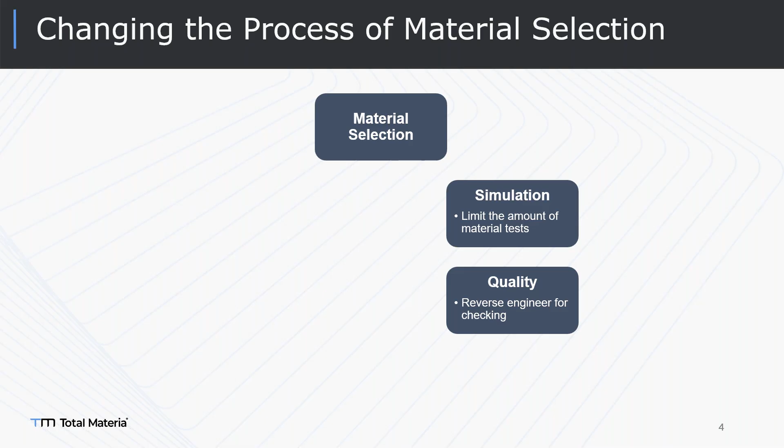Quality engineers are checking if it's the right quality material, or doing reverse engineering, we have very useful tools for that. But you choose the material, you check everything is fine, but what about where to get it, right? So the supplier or supply chain purchasing department needs a lot of information to find different producers or suppliers for this. And sustainability, your carbon footprint is important, finding greener materials for production, right? And compliance, if it's not compliant, then you need to start all over for this process.

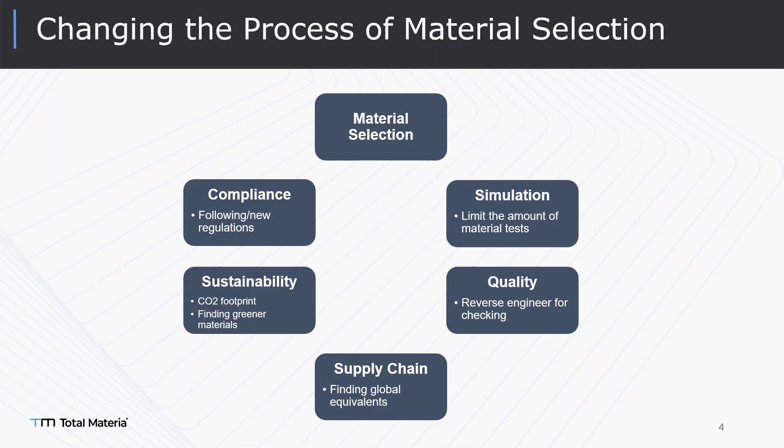So what is Total Materia doing to make sure that you're doing the right thing at each step? Not a classic way, but you have a lot more to solve, right?

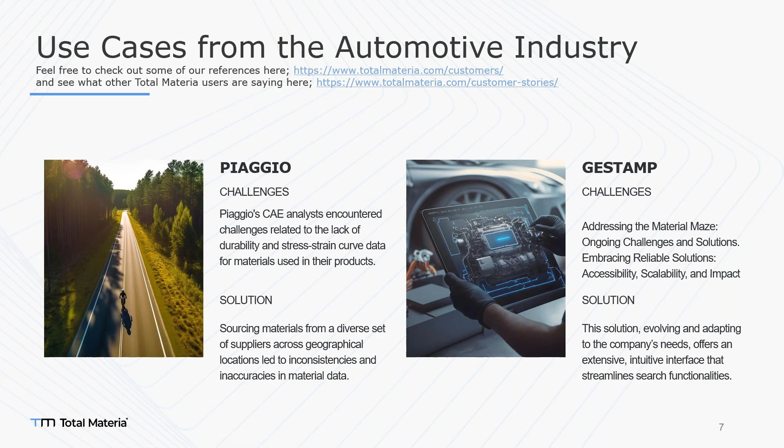We have some use cases from the automotive industry here. I'm giving you some examples, and these companies are global companies worldwide. They're making production, producing high-end products, so there's no place for mistake. But there is another industry where there's no place for mistake, if you'll agree — oil and gas industry.

SOCAR is our user, and companies like Shell, Texaco, Total — so many oil and gas companies are using Total Materia just for precision. You need to plan your maintenance activities, you need to justify your material selections. All these processes are possible with Total Materia, and they're actually very happy to use it. Every year, more and more engineers are using Total Materia from SOCAR.

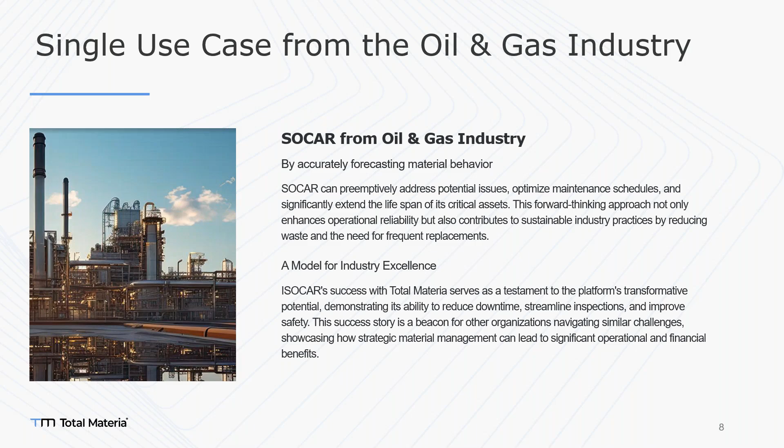This is just an example where you can find inside our new webpage references. We have worldwide thousands of users, from small companies or offices to industry leaders. Where there's no place for mistake, like aerospace, oil and gas, and so many different industries, material selection is simple and very much similar, because when you want to select the accurate material for your design, you need to check the mechanical, physical properties of the material, and at the same time fabricability, cost, availability, and corrosion resistance, among many other aspects.

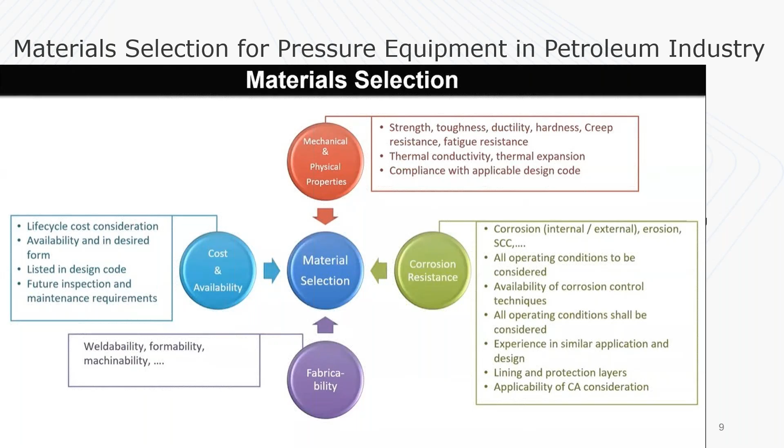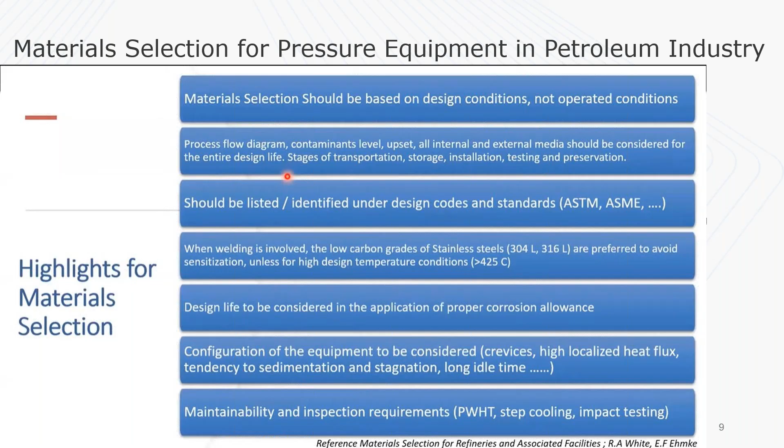And it's a little bit more complex than that. At the same time, you might need higher or lower temperature ratings or properties of these materials. It's more and more complex — you need to fix a lot of stuff, check again your design to see if it's right.

But basically, if it's hot or cold formed material, is it suitable for production? And what heat treated material are we talking about is important. You'll be able to find all these details under the same material card in Total Materia: matrix structure, grain size, composition, alloying elements, welding information, and so much more.

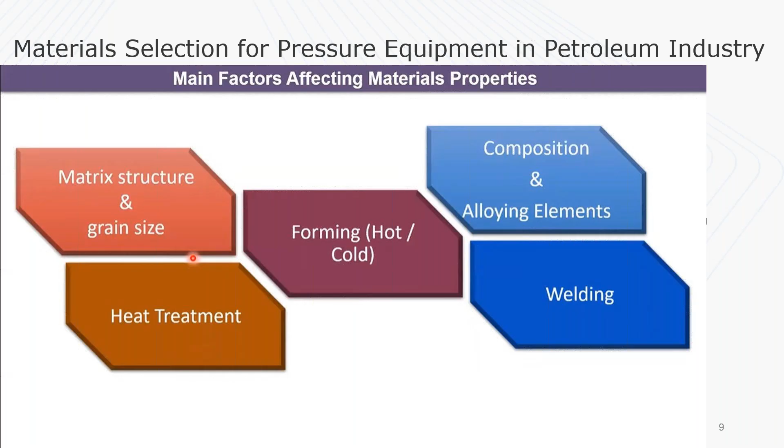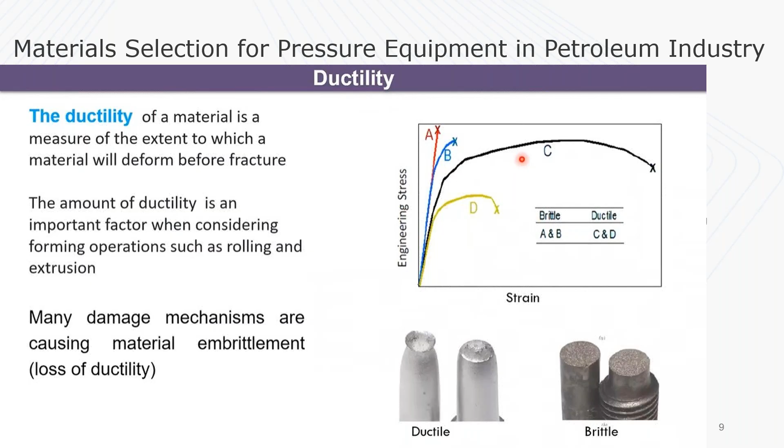Each individual bolt that you're using, you need to check again and again — engineering stress-strain, true stress-strain, hardness of the material, toughness of the material, and the effect of thickness on mechanical and physical properties. You need to check again and again to make sure you're choosing the right material from the right material groups.

That's how all these industry leaders, including aerospace industry leaders, are using Total Materia just for that. But it doesn't mean it's just an expensive solution — by the way, I told you we have different license options. So even if you're already a user, please advise your friends to start using Total Materia from today.

We'll be happy to help them as well, as we are helping Virgin Galactic, for instance — the aerospace leader — and they are happy to share their experience with Total Materia. They solve their material problems with us.

So this is basically starting with Horizon. Horizon is where you can try for free, test for free, and ask for technical support. I'm sure I can see so many of our users here today with us, and they'll be able to use Horizon for material selection, material identification, finding the global equivalents of those materials, sharing and exporting options, advanced properties, and using it as reference data at least.

We have a lot of options. We have over 500,000 materials recently — 571,000 materials according to the latest update, because every month content is updating. We are finding new materials, new material information, 80 plus global standards, which is 83 right now if I'm not wrong. When I started working for Total Materia, it was 58, then 62, 63, 65, and now 83.

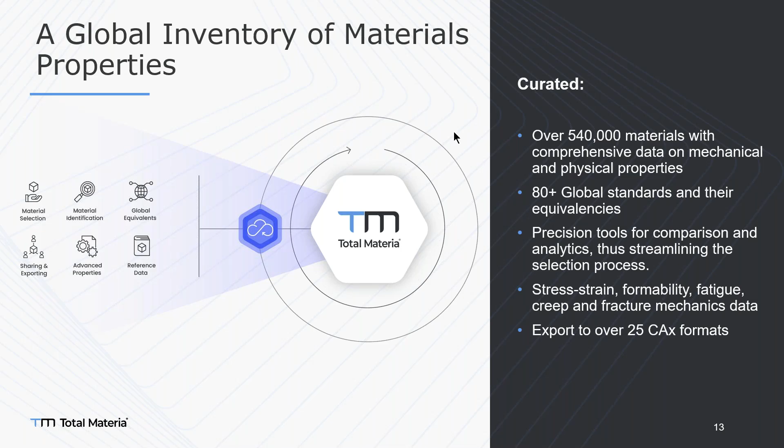You will be able to export more than 25 different simulations easily when you have Total Materia access.

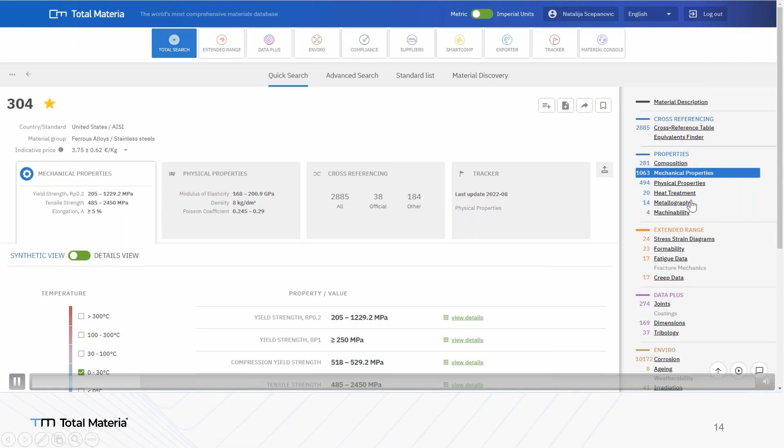This is the basic Horizon platform. You can see we have different data modules here: quick search, advanced search, standard list, material discovery, where you can search material from material designation, numerical or alphanumerical, filter the type of material - we have more than 4,000 added - and material groups. You can filter by standard, or check producers' names directly. For example, 304 American Standard material, kilogram price, and right-hand side information including material description and supplier information.

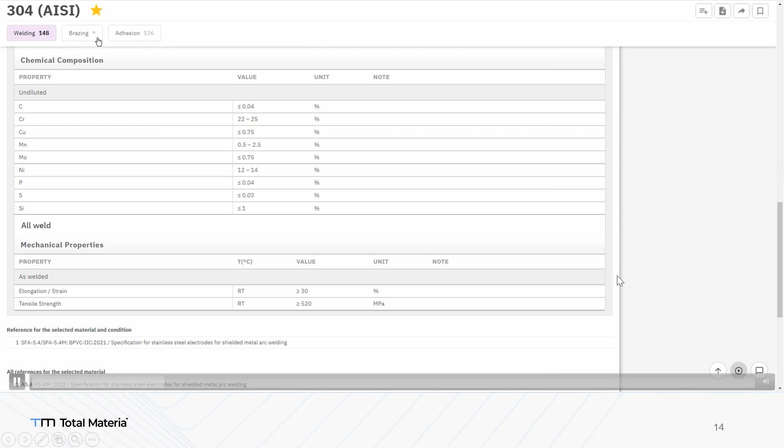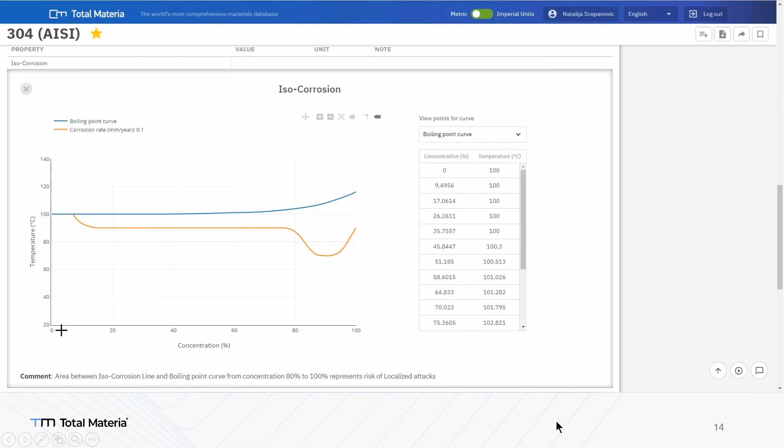You can find a lot of information about the same material: joints, 274 different welding information, SN curves, stress life parameters, isochrone stress strain, allowable stress, and isocorrosion test data. Very important for maintenance operations to calculate precisely.

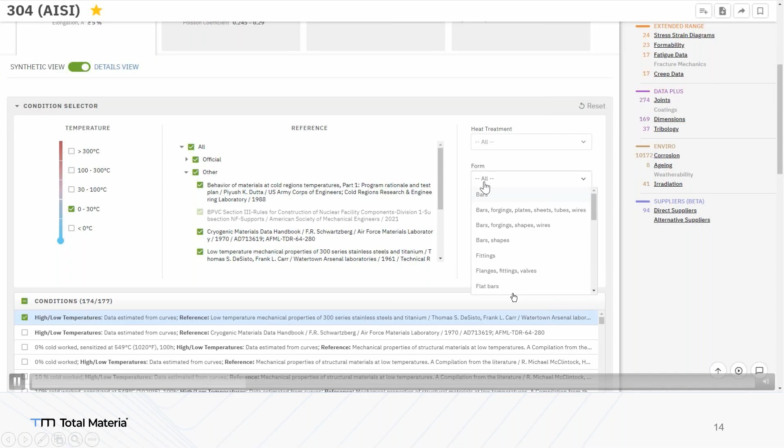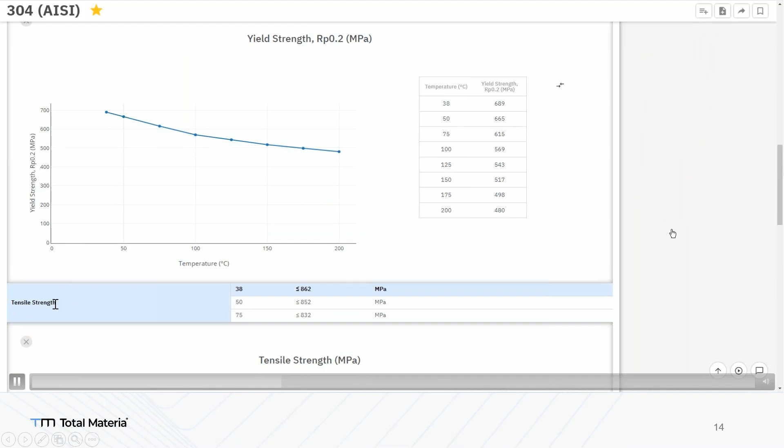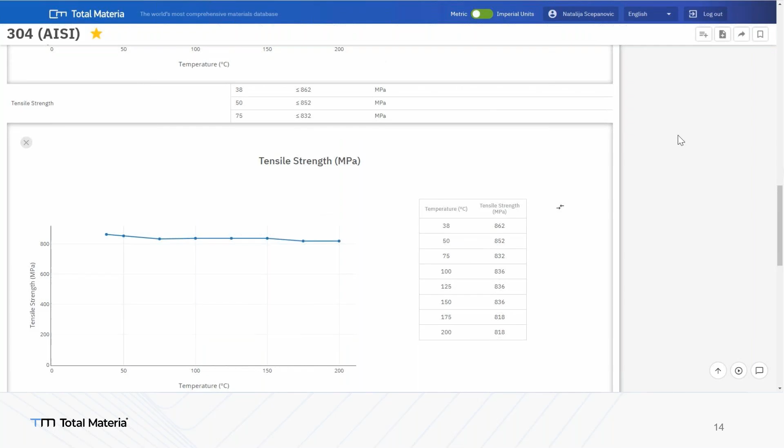You have elevated and minus temperature data and references, where you can find when and which standards cover what information - heat treatment, forms of material giving different mechanical and physical properties, and dimensions. Different sheet metals or wires in different dimensions give different properties. You need all this detailed information with references - you'll always be able to reach the reference for where we found it, where you can compare, and these are only accurate information.

With one click, you can use ANSYS, Abaqus, CATIA, SolidWorks, Siemens NX, any software you're using. With a couple of clicks, through careful selection, you can use this material card in your software.

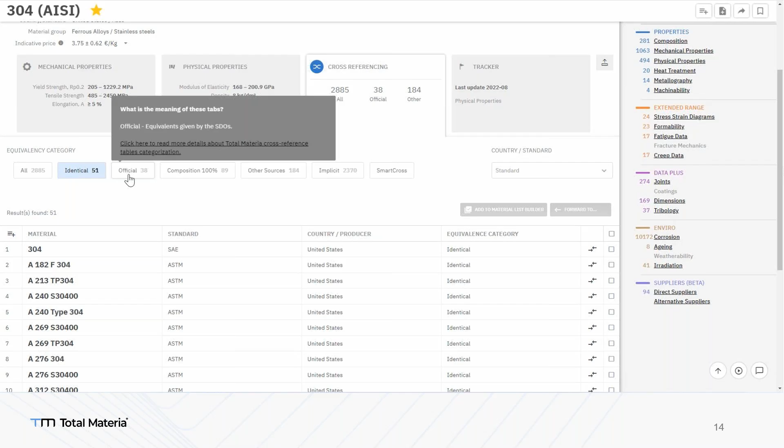Cross-reference is one of the most used case scenarios in Total Materia. You have a 304 AISI American Standard material, and you want to find the global equivalence - let's say the GB Chinese standard equivalence. We have 10 different options. With one click you can compare, save this file as a PDF, and get accurate information to make sure you're choosing the right alternative material.

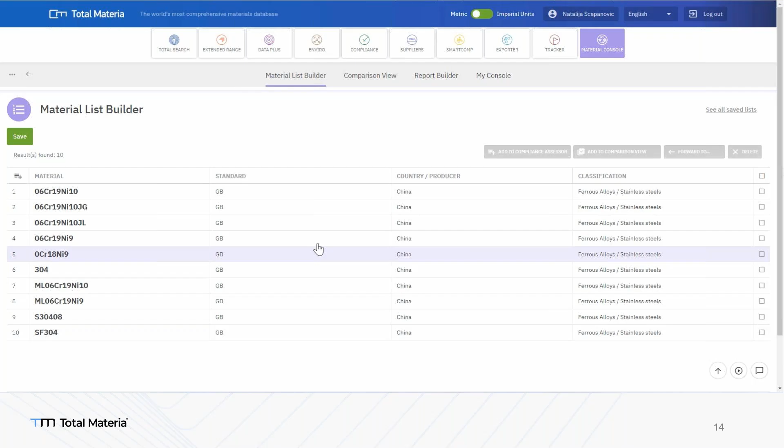You can create a material list from these materials - just name it GB equivalents of 304, let's say. You have more options, more producers now, and a lot of different supplier information you can find.

Here's the advanced search for advanced users. You can filter material groups if you want, check some mechanical and physical properties with minimum values you can add, and you'll be able to find a durable material according to your design.

You can save the searches and load these searches here. Let's choose one material - I want to show you.

We want GB or DIN standard material, structural and constructional steel, with yield strength minimum 300 megapascal and tensile strength minimum 500 megapascal. We want impact strength to be 40 joule minimum and modulus of elasticity 190 minimum - we want a durable material.

We had 500,000 materials. Now we have only 19 materials, GB and DIN standards. So these materials are okay for you to use in your design.

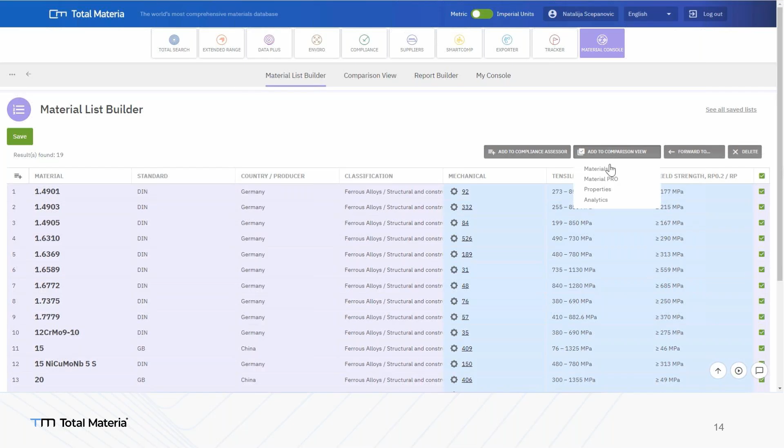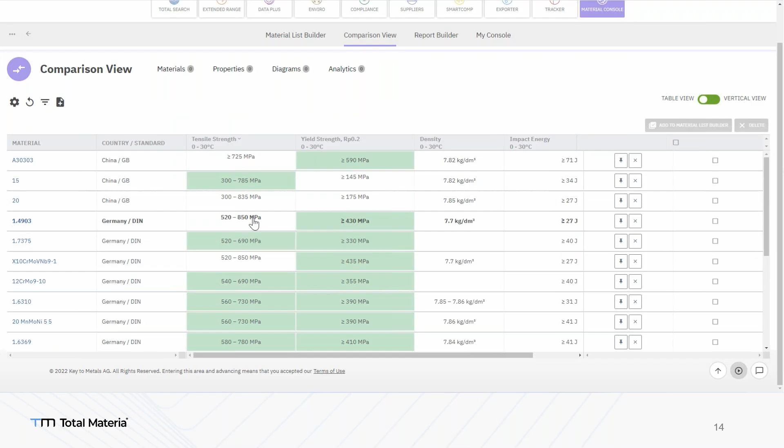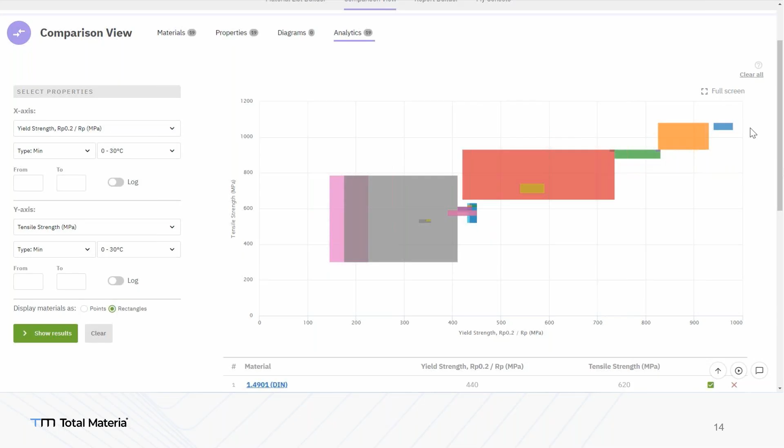You can still check these materials' tensile strength - which one is better for you, more durable, stronger, lighter, cheaper, basically better. You can compare this material side by side, up and down, and forward this material list to your analytics screen to find different aspects, comparing up to 5 different properties at the same time, or check which one is more suitable for your design.

This is advanced search, and you can also forward this material list to your compliance assessor to check if these materials are compliant according to different regulations. If they're not compliant, you have nothing to do - you need to find another one.

But the SmartComp is very different, online since 2007. This is our patented algorithm - from the chemical composition of the material you'll be able to define, or just check one of these materials as a reverse engineering action. We have quality mode, standard mode, and expert mode. When you check the chemical composition of this material, Total Materia is able to tell you what material it is.

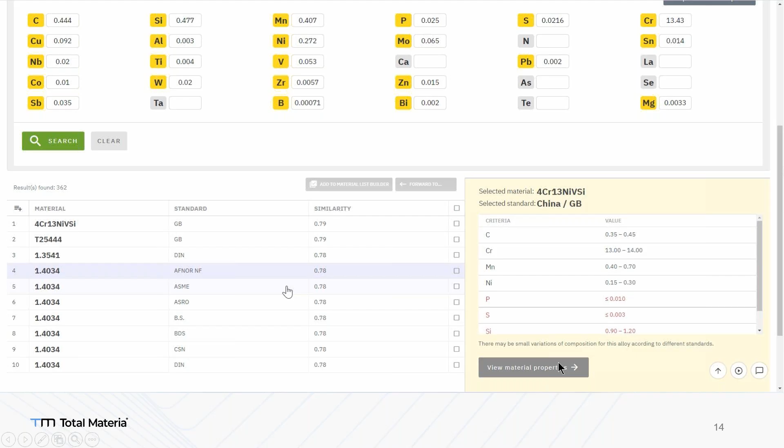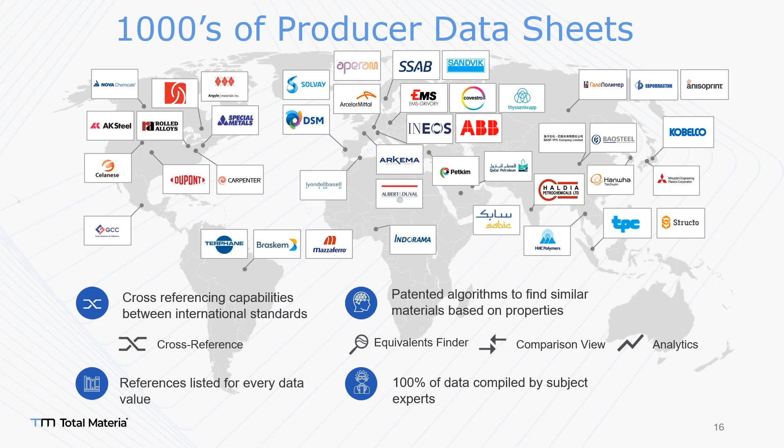This is our basic material content: over 83 standards organizations, including 39,000 local standards and thousands of producers' data sheets for real materials. Some producers make production according to these standards but name their own material differently. So it's very easy to find the equivalence and the same material, or according to mechanical and physical properties, something very similar - especially in polymers.

According to my experience, so many of our users are just checking the polymers equivalence, local equivalence. So our very important solution is the Integrator, where you can create your own internal database, basically. This is connecting our world with yours.

You can connect your CRM, ERP, PLM systems, where you will be able to access the full version of Horizon, and use them together. Together we are stronger. And you have reference data in Horizon: global alternatives, material selection options, identification, joints and welds. All this information you can use from Horizon.

You can copy all these material cards, but only the approved materials, because maybe you don't need 500,000 materials, but some of them are very critical. You can copy these material cards, create new material cards, add these materials, test information, like set your user management for who can see what material information. And this is very important for security policies.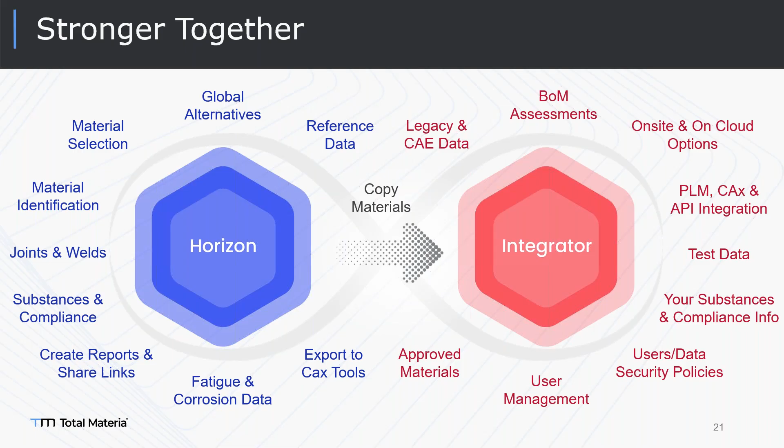BOM assessment, bill of material, you can check. And this is the legacy and simulation data, all this information that you can copy from Horizon to Integrator, basically. And this is basically MLM, Material Lifecycle Management, one step further than using only Horizon.

Because the material engineer has access to Horizon, let's say you have Greenline access to check your carbon footprint or compliance information about this material. You're filling the blanks with predictor, test simulator.

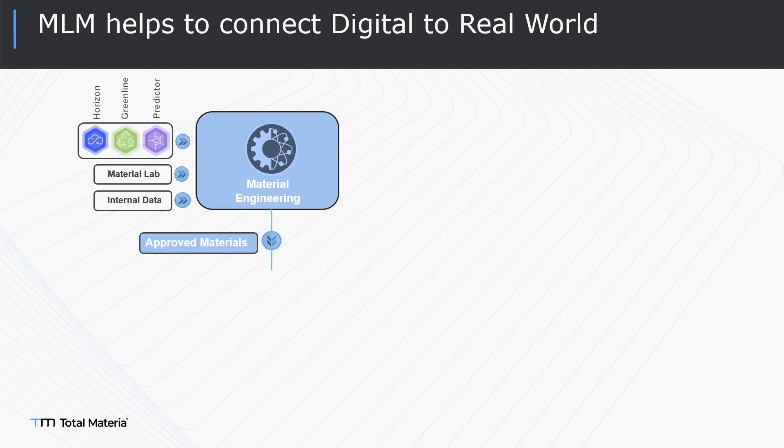Still, you have a lot of work to do in material labs. Internal data you generated, so many files like Excel, PDF, and they're everywhere. So when you approve these materials, you need to filter all this material. You can copy it inside your MLM, Material Lifecycle Management System, Integrator.

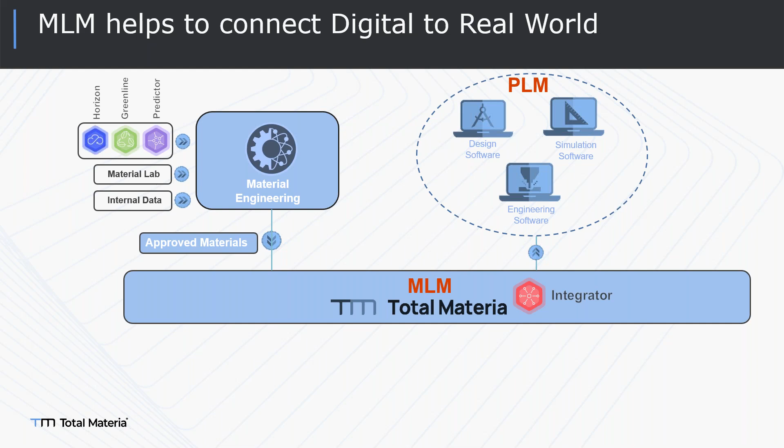When you copy and filter all this information, this will give you the ability to use all this information in your PLM system. You can use this material information with your design software, simulation software, engineering software, anything you're using. And this is actually connecting the digital world to the real world, right?

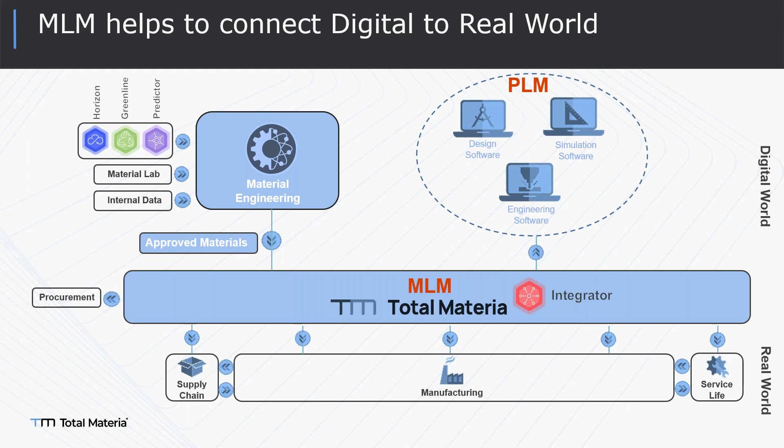So it helps a lot. It makes this whole process shorter. That's what Virgin Galactic was talking about - we had a lot of problems, and we solved all these material information problems with Total Materia Integrator, basically, and your system to fit your users.

So you have your own materials. Some of these users can access all material at the same time if you want. Admins and super admins can decide this.

And in your internal standard material, you have this information. Basically, this is your own material - no one but your company can have access.

So it gives you precision. For precision engineering, Total Materia is a must-have, obviously. That's why a lot of industry leaders are using Total Materia for years.

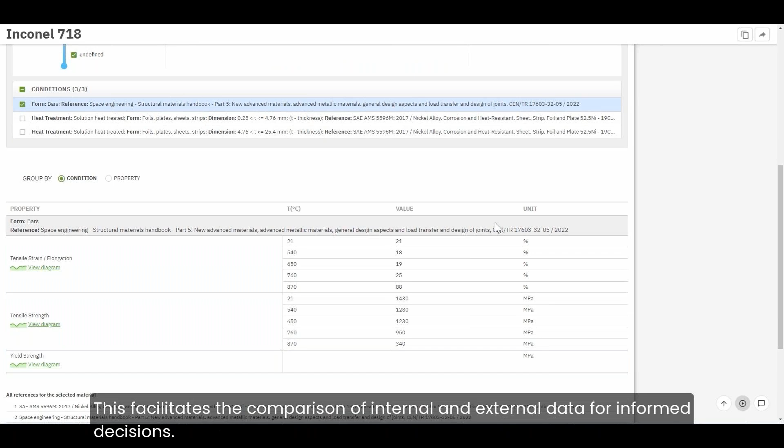You can create any material card from the beginning, or you can copy some material cards from Total Materia into your system and edit them. You can add your test data or anything you want.

Or if you want to check richer material information, like Inconel 718, a popular material used in aerospace - we have internal standards, Korean standards, and some producers using SAE and UNS standards for this material - and you want to find suppliers for it, you'll be able to check in Total Materia.

You can filter this information into your system so that your procurement engineers will be able to find the alternative suppliers that you define for this material.

You can create from the beginning, or edit all this material information. You can create material groups, create properties, add any test data you have - for instance, supplier information for this material, or any parameters you want, or references, or whatever you want.

So the bulk export option will give you the ability to export all these material cards into a certain different simulation software that you're using. That'll be a win situation basically.

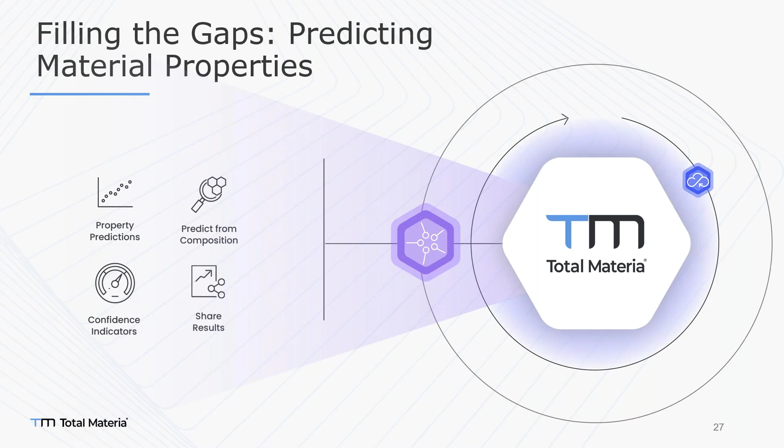More than 570,000 materials, over 25 million records of material data - we have a lot of references to make accurate calculations. Basically, this is how Predictor works, and this is how it can give you accurate results.

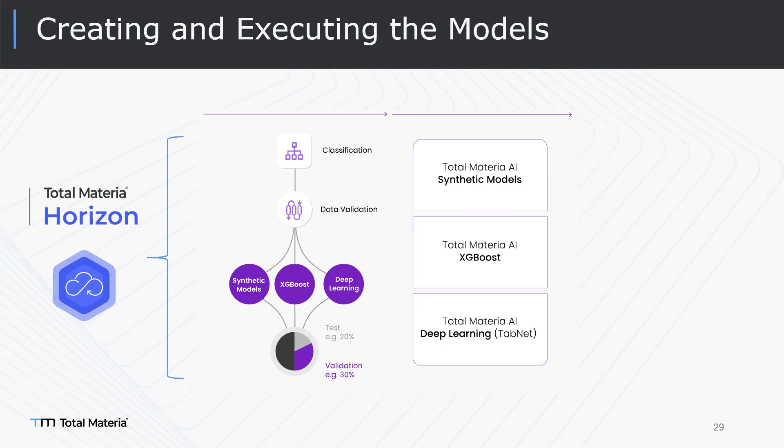It's a little complicated calculation system - don't ask me to explain all these details of how this calculation method works. Dower and Tanya will explain in detail if you really want to know how these calculations are working.

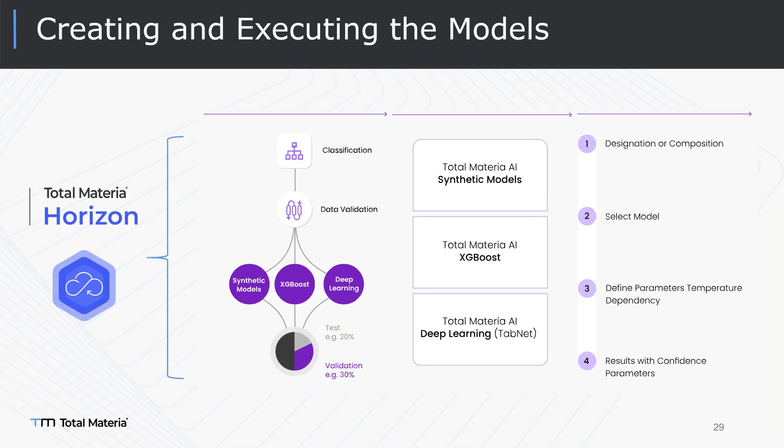We have designation and composition inputs for selecting models, and you define parameters like temperature dependency or whatever you want to achieve, and the result comes in seconds with confidence. We're using metallic and non-metallic materials to fill the gaps.

Step one, you choose the designation of the material. Let's say for one designation material, there are some properties missing. You want to get a selection for the model and set up additional model inputs.

Which Total Materia Predictor helps you with, according to what property you want to choose, giving you a couple of options. Then in seconds, AI tells you the properties - you can get this for different alloys, as you can see, including polymers. With the chemical composition, you'll be able to get predictions for mechanical properties.

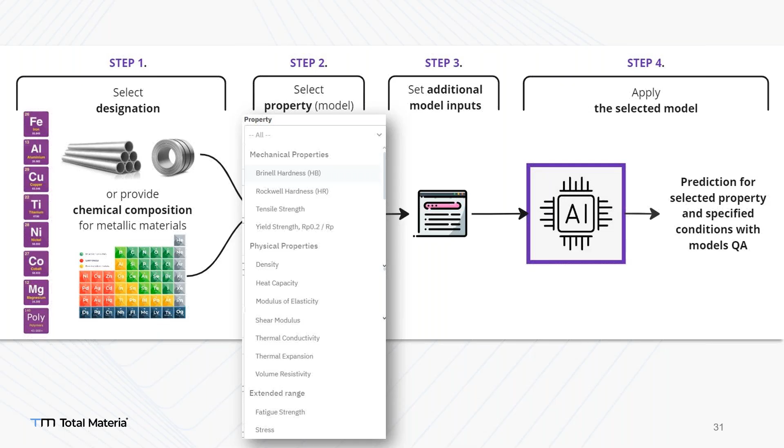We are providing hardness predictions, tensile strength, and yield strength predictions. For physical properties, we are providing density, heat capacity, modulus of elasticity, shear modulus, thermal conductivity, thermal expansion, and volume resistivity so far, including fatigue strength and stress-strain curves that you can generate with Predictor.

This is how it works - you have a material, you can type the designation or choose the composition of the material, pressing the next step and selecting the material basically.

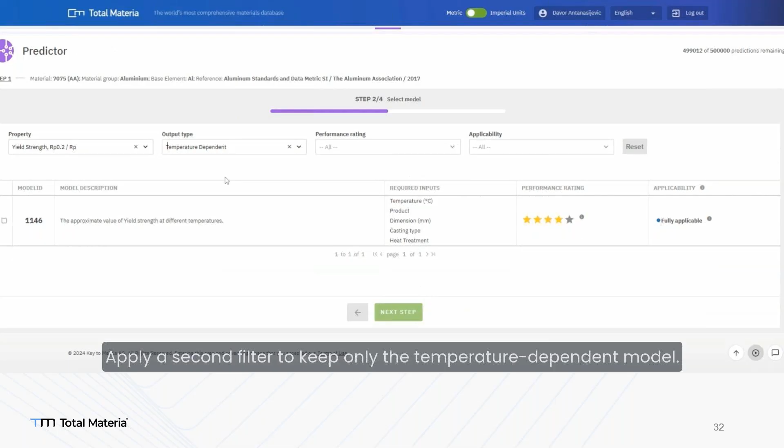Then choose the property you want to predict here, and whether you want it temperature dependent, let's say. You see the algorithm offers you the best calculation method according to your selection.

And basically you're choosing the plate for thickness 20 millimeters, and the heat treatment of the material will definitely affect the result, because you want accurate information, not just regular estimations.

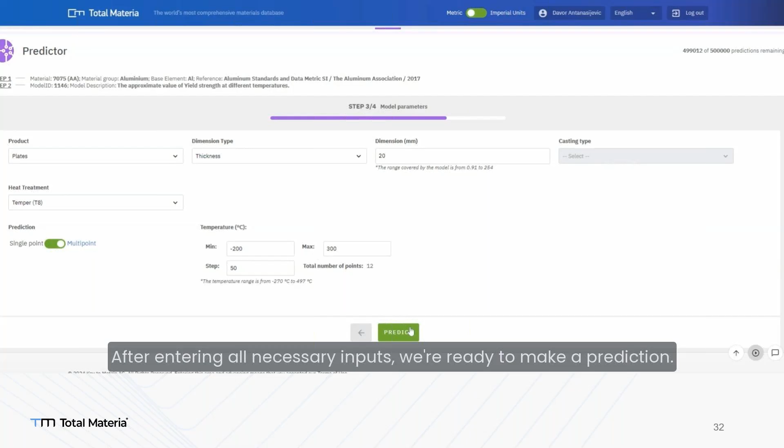You've got to make some calculations - you're going to use this info for your simulations, maybe.

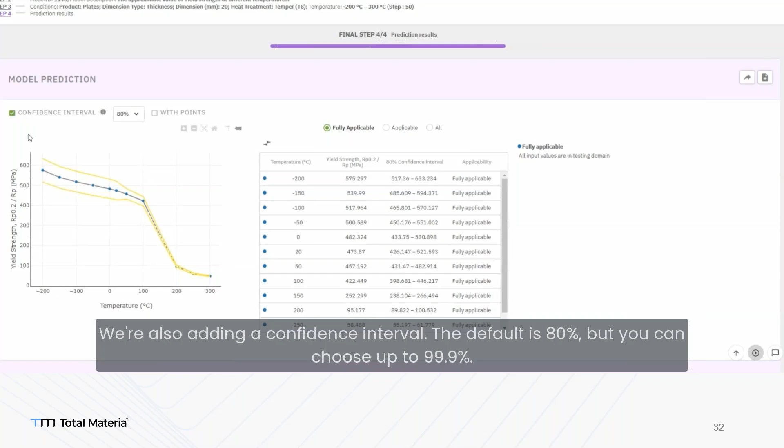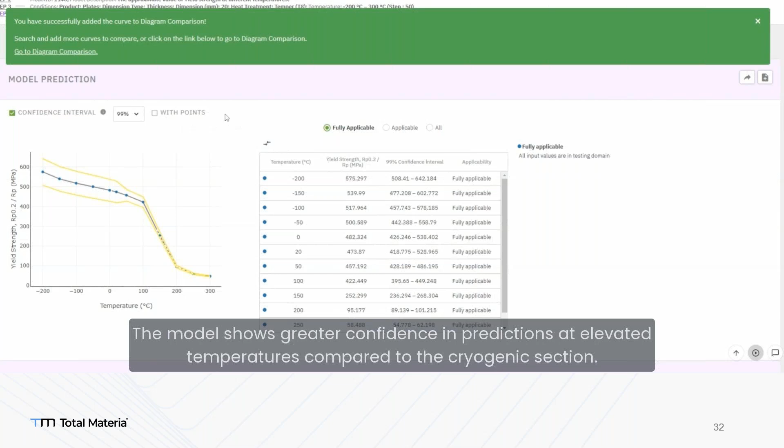The result generates in seconds, as I mentioned, and you can get these with points. You have all this detailed information across a different temperature range, and you can add this graph comparison.

Here you can see we're making the same predictions for the same material - this is the T8 heat treatment of 7075, same material and same form, same thickness, but this time we have T73. Two different heat treatments of this material - see how it's affecting results at minus temperature, especially when it's very cold. You see the T8 gives you a little higher yield strength, while T73 at minus temperature has a much lower yield strength value.

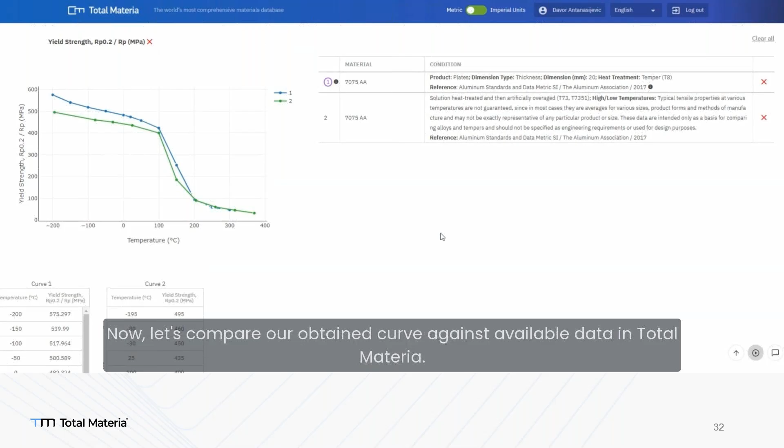So when you are making accurate calculations like aerospace industry, defense industry, oil and gas, heavy machinery, automotive, all this detailed information, precise calculations are generated in seconds. You don't need to waste a lot of money and you don't need to wait for temperature dependent tests for weeks or months. Predictor is giving you the results in seconds, basically.

And if the issue is finding the greener material, here is Total Materia Green Line for you. You can check the compliance of this material, equivalence, restricted substances, BOM assessment, LCA, carbon footprint calculations, sustainable material selections. We are proud to announce our primary source of data is coming from EcoInvent. Green Line is helping a lot of industry leaders who would like to see their carbon footprint, how these materials are affecting their life cycle assessment, or checking their materials' compliance ability.

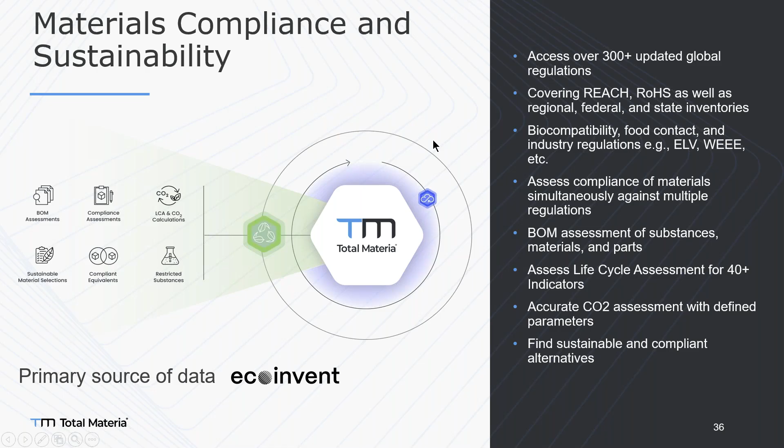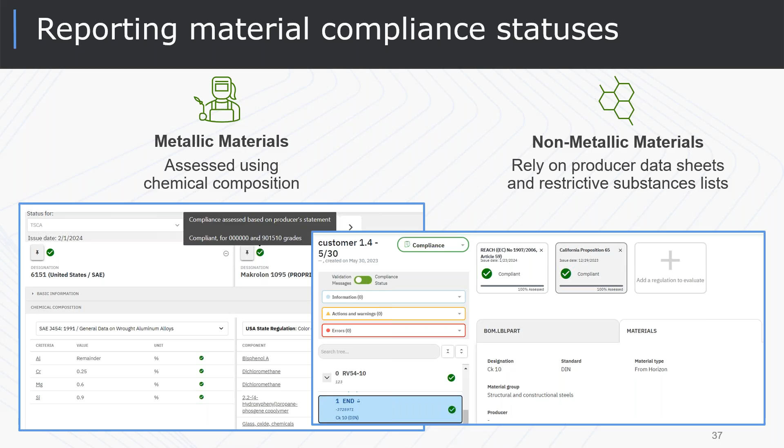As you can see, we are covering more than 300 up-to-date global regulations, covering REACH, RoHS as well as regional, federal, and state inventories. This is huge, making sure whatever you're doing is reaching the up-to-date information. We have the Green Line team, Predictor team, and Integrator team separately, ready to help you compare your material list according to 5 different regulations at the same time, but we are covering over 300 different regulations you can check your material list against. The sustainability parameters we cover are raw material extraction, manufacturing process, transportation, use, and end of life information.

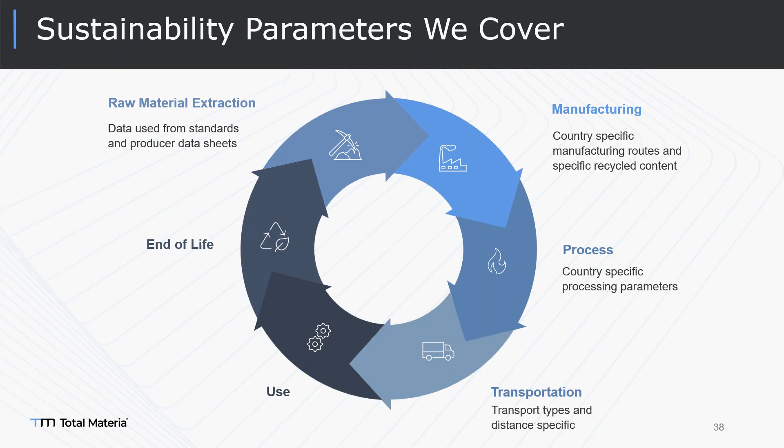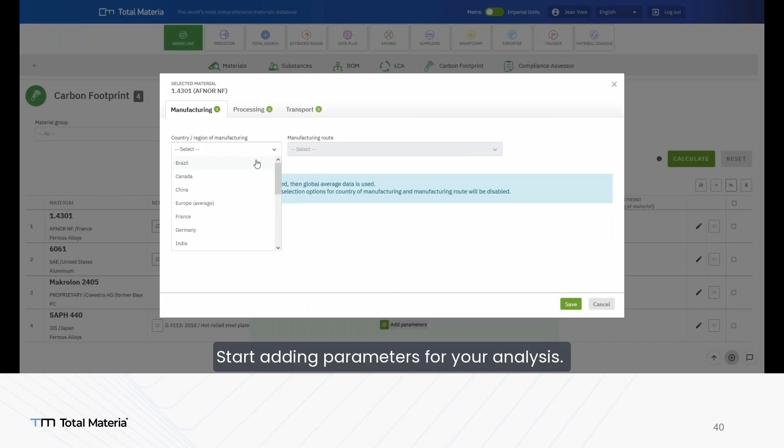We are helping engineers find a greener material, basically, and this is how carbon footprint actually works. I would like to show you an example, maybe you would like to see how you can get information about your carbon footprint, how the materials you're using for production are affecting your carbon footprint.

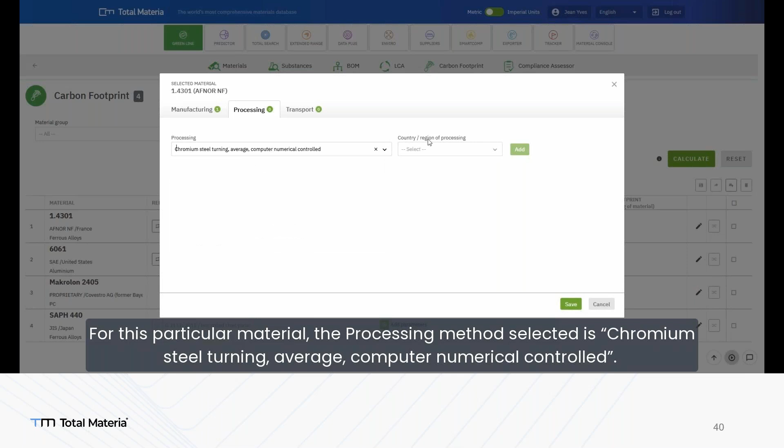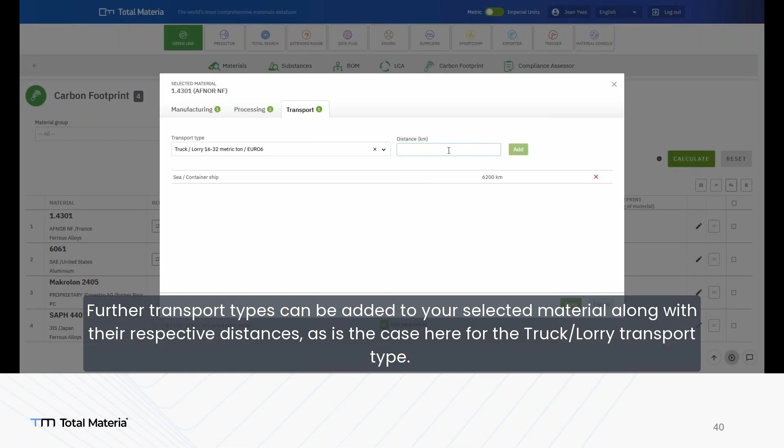You can type, for example, sea container ship, 6,200 kilometers, and then it comes by truck or lorry. You can choose a Euro 6 truck, for 500 kilometers, and then it reaches the destination for production, and make the calculation. You will be able to see 4.455 - well, basically, it is greener than the others.

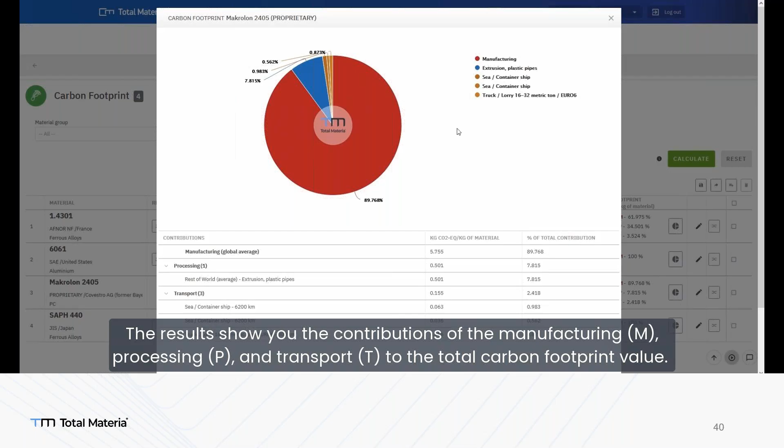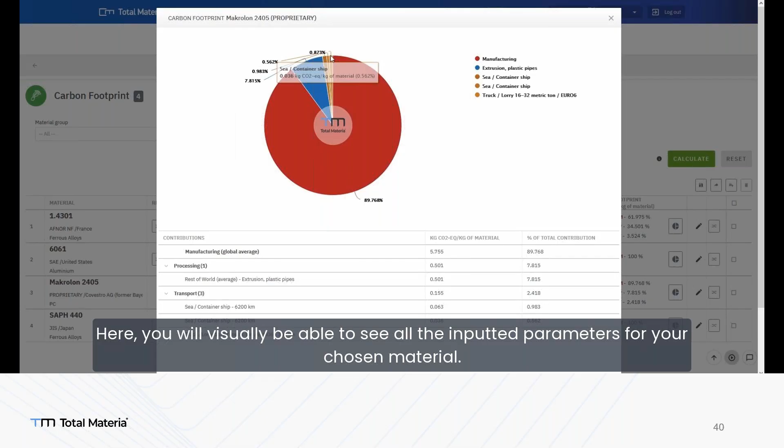You can see which of the materials you're using are heavy, and which of those materials are greener than the others, basically. These calculations will give you a very good reference point to start decreasing your carbon footprint, starting with materials.

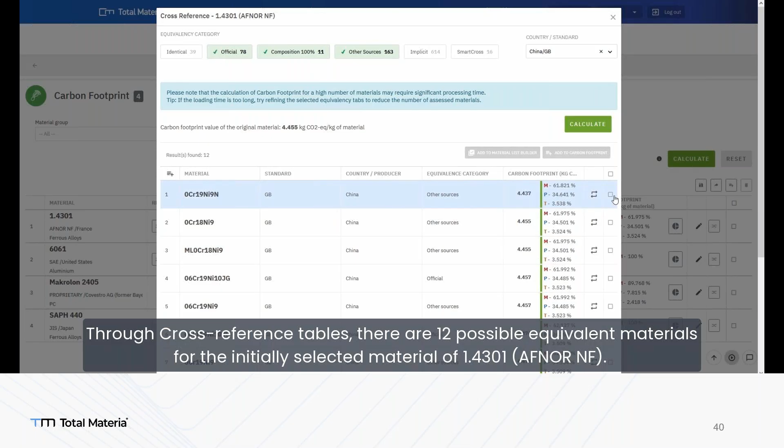Here, you want to find something equivalent with a Chinese standard, let's say. I want to see something with the same parameters to find something a little greener, right? You see how easy it is for you to find the greener material. And you can export this work to an Excel file, to understand how these materials are affecting your carbon footprint.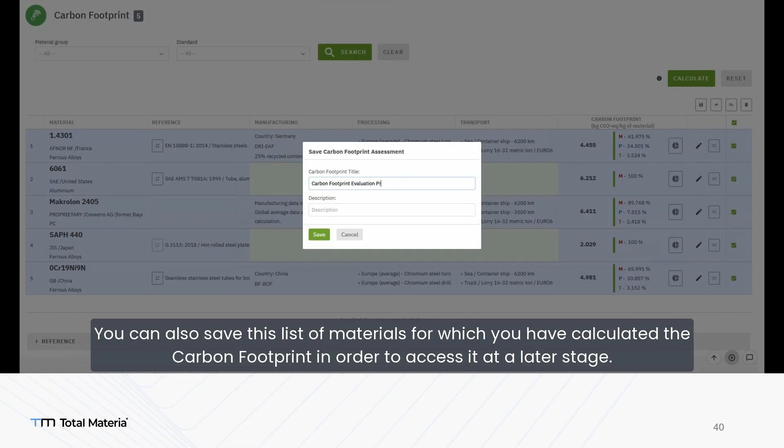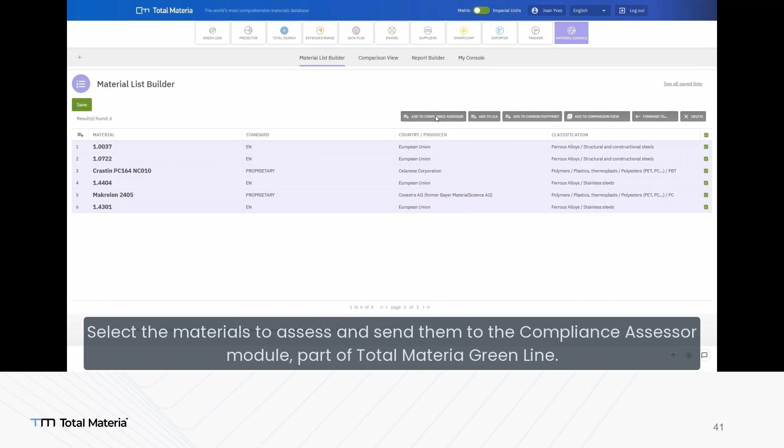We have Compliance Assessor. Simply, you have materials, and you can check one by one, or a group of materials at the same time, with Compliance Assessor. We have a list of materials here - I'm adding this list to the Compliance Assessor. That's it. I want to check REACH, RoHS, and at the same time up to 5 different regulations, to see if this material list is compliant according to different regulations, right?

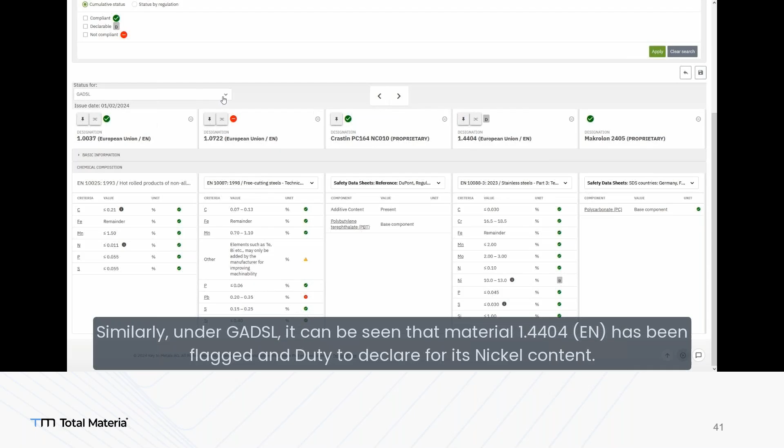We have a problem here - it shows you some red points. No, it's not compliant according to any of these regulations. All right, so what am I going to do? Here is an example - okay, I want something. What is the problem? The level is a little higher than what is okay. And even though you see some polymers which have not provided their chemical composition, they need to provide the compliance information for their materials.

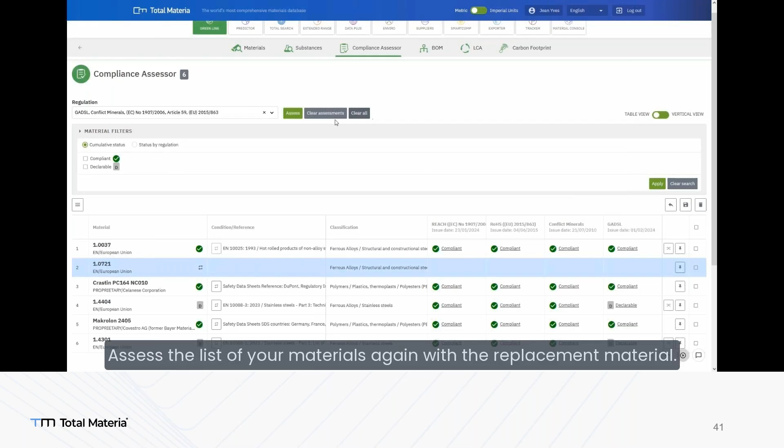So with one click, I want to see EN equivalents that are compliant according to these regulations. I have two candidates, you see - I have two candidates. Basically it says, well, choose the right standard material, not the 1998 one, the 2018 standard. Save it. This information will give your procurement and purchasing department, and everyone, valuable information when choosing the material for production, checking this material against standards, to make sure that you're doing the right thing and you won't have any problems.

So better safe than sorry. This is how it helps - you have a saved list of materials, basically compliant. That's it, it's very easy to use.

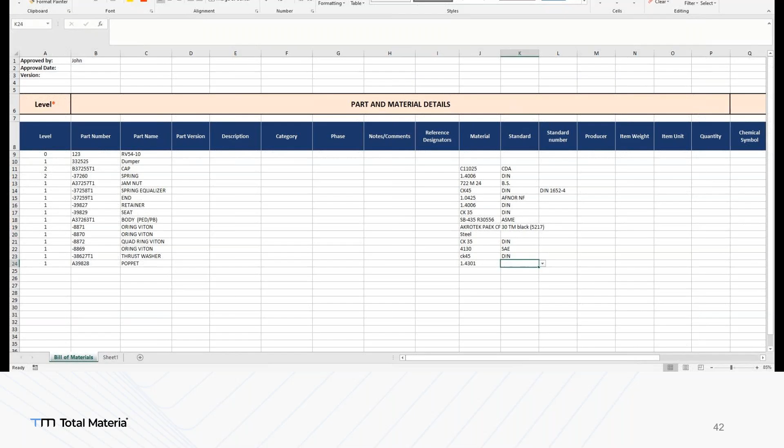If you want to test Total Materia Green Line, always welcome, but not just with a few materials here - we have bill of materials that can be like 500 materials, can be thousands of materials at the same time. And you see, you're just typing who did this BOM assessment, who has this material information here, and what standards.

What are those materials? Detailed information, and you can export this template, fill it with your material information, and now you have a bill of material here.

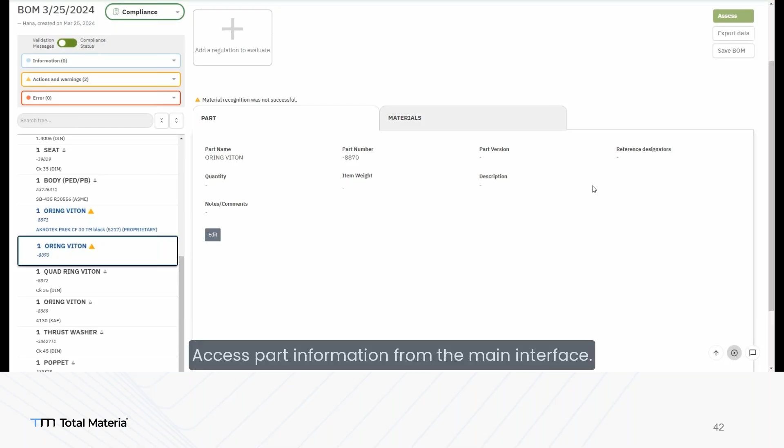Basically, this is how you can show and check if these materials are compliant according to different regulations, but a bill of material can be a huge list, right? It will be very hard to check one by one, and you've got to make sure you're using the right, compliant material, and all you need is to add the regulations to evaluate.

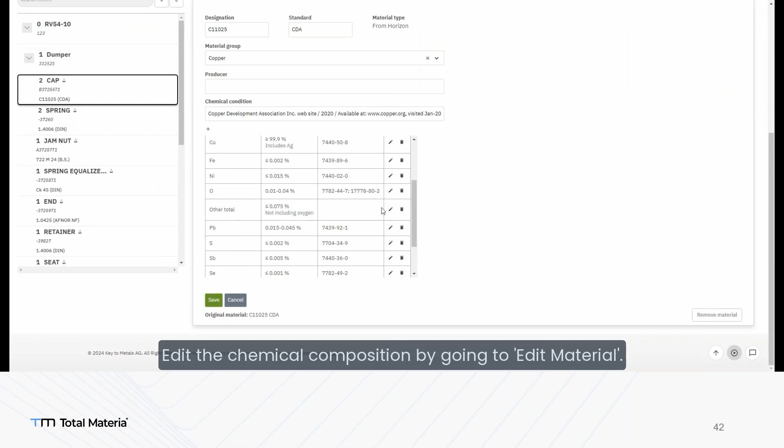Here, there's a little settings before you start - material type custom, material designation here.

Here you see the original material, CDA, and you start adding the regulations - one, two, three, four, five. You can add different regulations at the same time. We have up to 300 different regulations here.

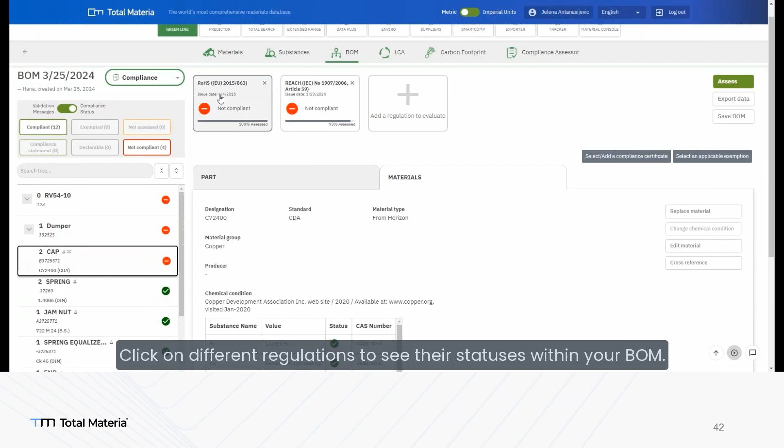We have a problem, not compliant. What is the problem? You can easily check where the problem is, what materials are not compliant according to what. Basically, you have the list, you can apply.

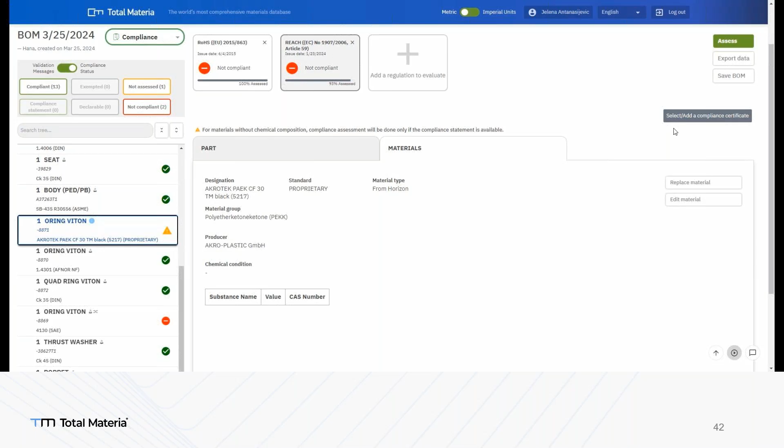You see, basically the origin of these materials had a problem. You can check compliance by producers to make sure you're doing the right thing.

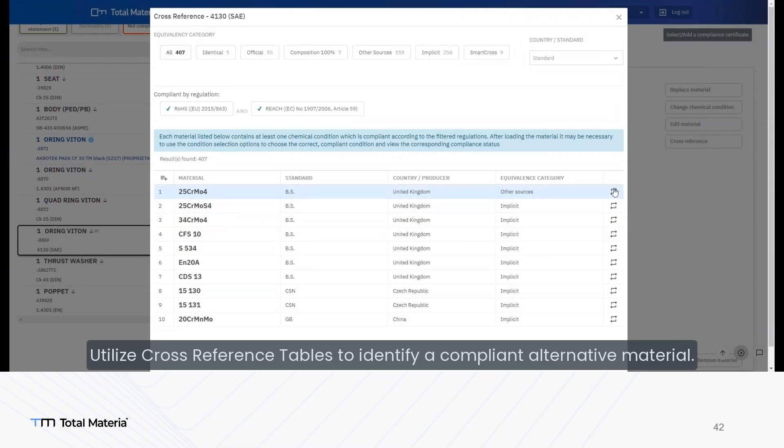Here's a chemical composition problematic part. You will need to check, double check these materials to find the compliant alternatives in seconds.

And you can access your bill of material again to find the greener and compliant one according to up-to-date information. You can export this bill of material, which is checked this date, and is compliant according to your BOM assessment.

You see the details, need to be very careful next time, right? Total Materia is here to help.

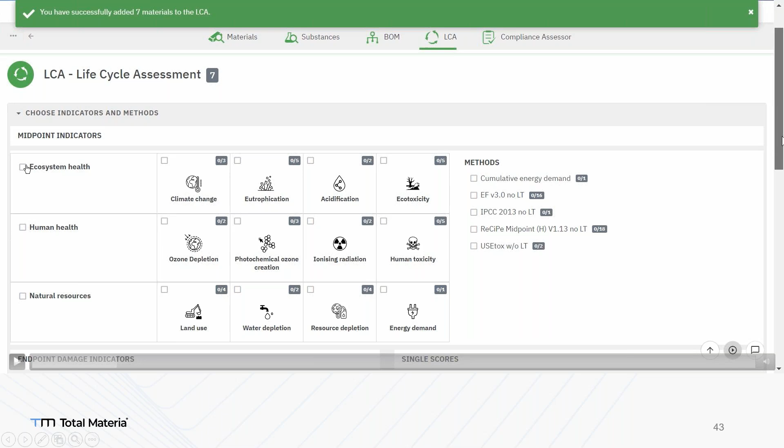We have life cycle assessment right before the carbon footprint calculations. You have a list of materials and different calculation methods, obviously, how it affects ecosystem health, human health, natural resources. You can check this material with different calculation methods.

Here's more material information, and I'm choosing different calculation methods to see how it affects climate change, how it affects energy demand, and how it affects freshwater ecotoxicity.

And with one pinpoint, you will be able to see the greener or non-greener material that you're using. With one click, you can check and change this material with the greener ones, basically. And a lot more to talk about with Green Line.